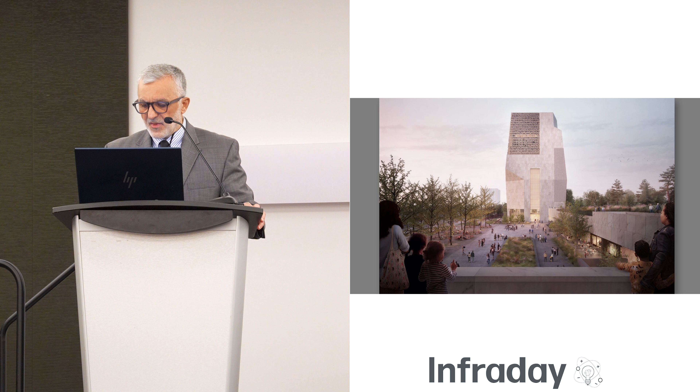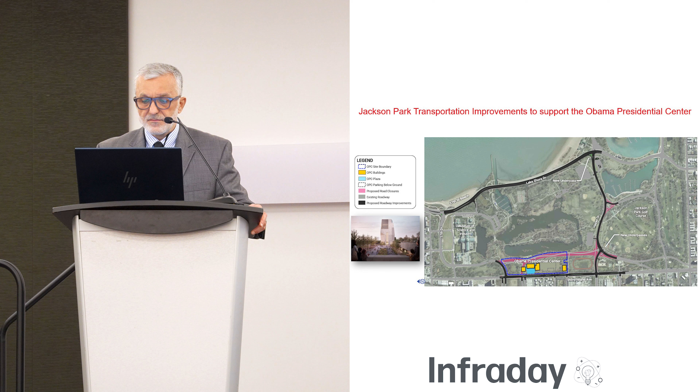Just for orientation, the Obama Center is very close to the Museum of Science and Industry. So if you are out of town, you could visit the museum and also take a look at this under construction. I'm not sure when it's going to open, but probably in the next 2 years or so. So that's the first type of program, which is coordinating with adjacent private development. And we have other examples, but in the interest of time, I included only the OPC.

Another program is this one. I could classify it as in the interest of sustainability. The current design for our roadways and bridges is very sustainable. And in the current design, the hierarchy starts with the pedestrian. You start with the pedestrian in mind, and then you move to transit. And then the third is bicyclists, accommodations, lanes, and then the auto. But that doesn't mean the auto is neglected. But it is a totally different paradigm shift from the way we used to design.

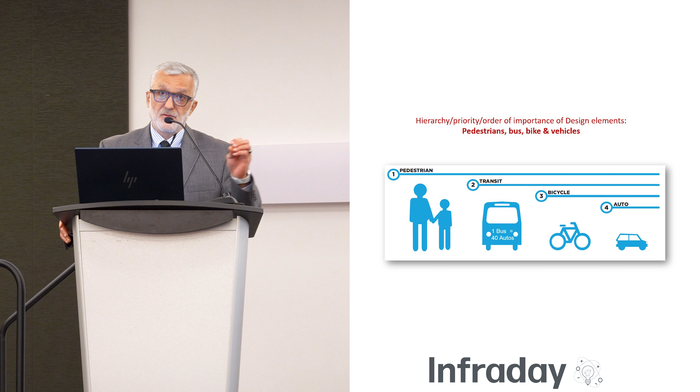I have been a while with CDOT, and I could tell you in the past we had a project, a bridge or a roadway, new road or a rehab, and we started with the auto, because it's the most dominant, most prominent user of the facility. So we used to start with the auto, and when you design the road for vehicles, you directly or indirectly design it for transit, because transit uses the same lanes as the vehicles. And then of course you have the sidewalk for pedestrians, and bicycle lane was not in the terminology, but I'm talking 20 years ago or so plus.

This type of hierarchy was adopted by the city, don't quote me on the years, around 15 plus years ago. So right now when you have a design, you always start from left to right, and you make sure you're designing a facility or a bridge or whatever the transportation facility for all modes of transportation, especially pedestrians and bicyclists. And this is in line with the previous panelists and presenters before me, that you have to do something to help the climate change, to be sustainable, decarbonization, and so on.

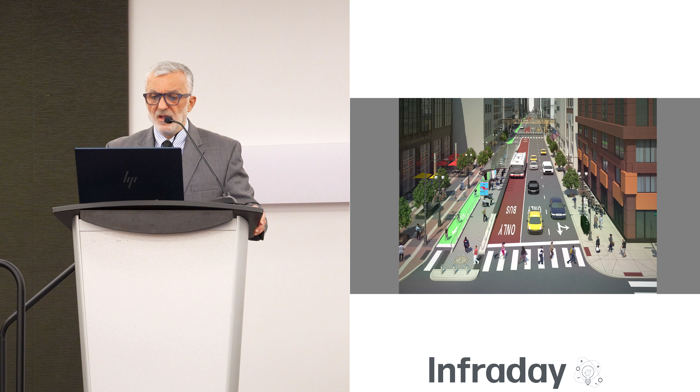So this one, you could think of it as a sustainable design, but the terminology that the city adopted is complete street design, complete for every mode of transport, every user.

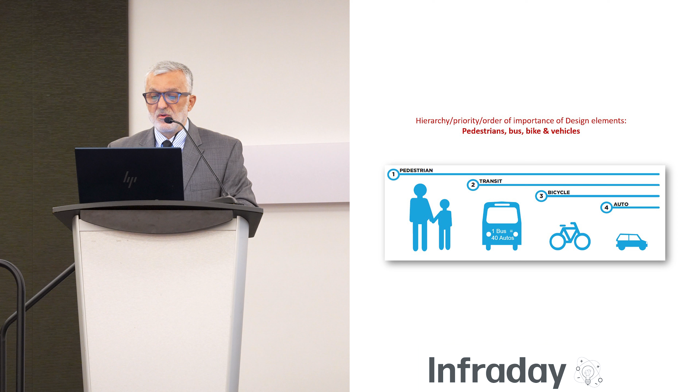Another program selected. I did not have time to select all of them, but this is the CTA stations, transit stations, an agreement between CTA and CDOT. All the train stations, the transit stations within the central business district are designed and constructed by CDOT, and then turned over to CTA for ownership and maintenance.

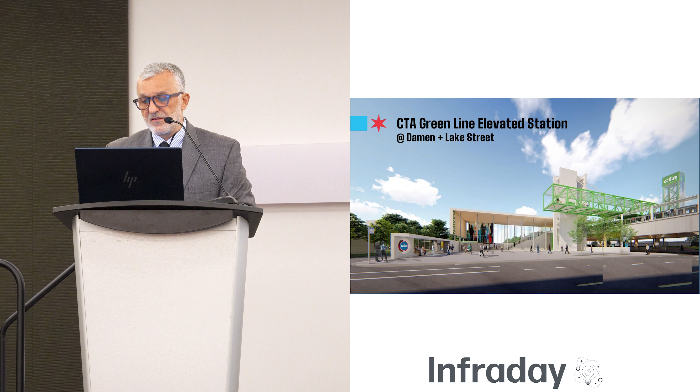The benefits are vast. LEDs have much less malfunctioning compared to high-pressure sodium. They consume less electricity. The saving to the city is $10 million per year, which is substantial. But also there is another benefit from the advancement of internet and computer technology. Each one of those lights has an IP address, where if the light malfunctions, it alerts a monitoring person to dispatch the maintenance crew to change it.

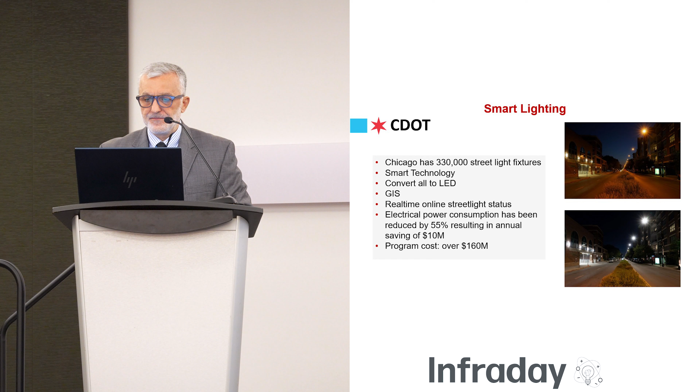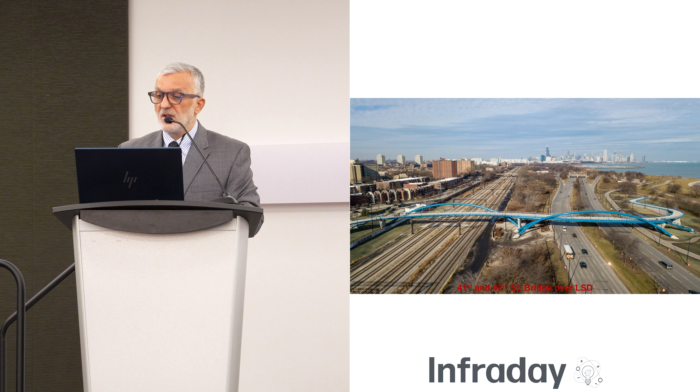So how do you make the lake available? There used to be bridges. Before, it was connected, but it was very awkward. Wooden bridges, old, not very safe. Accessibility for ADA is very important, and you can see that the ramps are very accessible with a gentle slope.

Then I will move, in the remaining time, to innovation. In all of our industry, all of your industry, my industry, which is probably very close to the same, you cannot do the same thing over and over. You have to adapt. You have to innovate. And I have seen in the previous panel a lot of interesting ideas. So what kind of innovations are implemented or in the way of being implemented at CDOT? I selected two, one in design and one in construction.

So here is the way we used to prepare all of our drawings. If you are an engineer or architect or anything, this is how drawings used to be prepared. This was before my time, I never worked on a project where we used this, but the people before us did. This is the blueprint. It's flooded with blue, very difficult to annotate, to make comments. Then the industry improved to blue line. The background changed to white, and the lines became blue. Very good. I have done many projects on this one.

And then in the past maybe 10, 12 years, the industry, all of us, switched to this. I don't know the name of this, but I'll call it a PDF. We call this blue line, we don't call this black line, but it's PDF files. But it's still very busy. So look at this, a copy from an actual design of a project we are working on, a bridge.

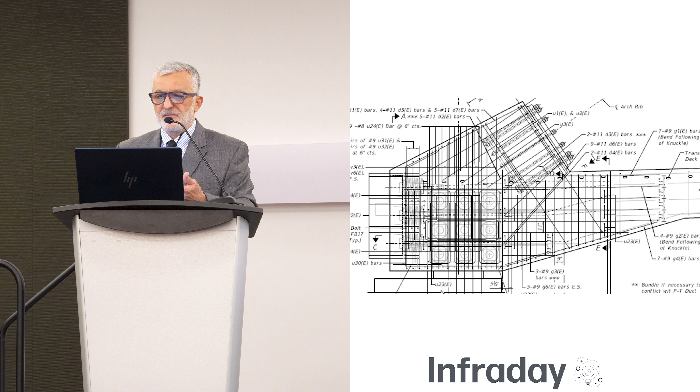So what do you do when you're looking at this on the screen? You enlarge it, and it's still very busy, blinding actually. You have no idea what those lines are, and there's a lot of waste in it. Everyone who gets hold of this drawing has to understand what this line is without going through the detail. So is there better? Yes, there is definitely better.

So here is an example from a bridge where we are almost completing the design. This is a rendering, a copy of the picture from the drawing. If you're looking at it as a reviewer, or in construction, or a contractor or fabricator, you will start asking, what are those holes? And it will take you minutes, sometimes tens of minutes, just to figure it out. But this is a 2D drawing.

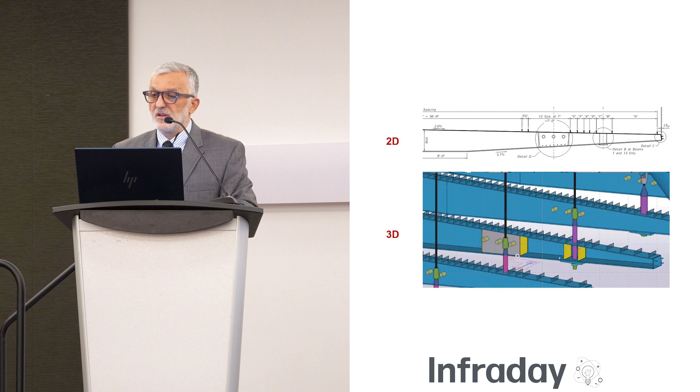What about changing to 3D? And here it is. Look at that. Those holes, 1, 2, 3, those are conduits going through the beam. And what is this dotted line? Those are stiffener plates on both sides.

Another example from the same project: how is this hanger connected to the arch? Here is how it's shown on the 2D drawing. This is the arch. This is the hanger. Very complicated. You need minutes and hours just to understand it if you are a fabricator. And here is the 3D drawing. See, it's a little clearer now, with coloring. That's all computer software used by the consultant, who did a very good job.

And then you say, well, is there better than this? Yeah, look at this. You could isolate this and put it on the right, and even this one doesn't give you the full picture. What kind of plate is this? Is it a square, a rectangle? Or you could rotate it, and then the picture is very, very clear. This plate has this funny looking shape. There is a reason for that. It's not architectural or aesthetics.

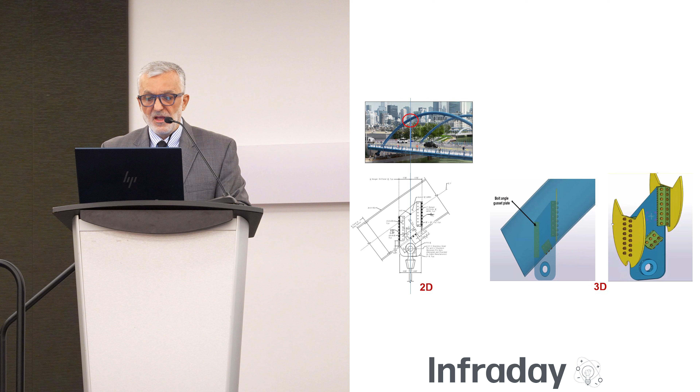Is there better than 3D? Yes, there are videos that could be prepared for the same bridge. In the interest of time, I will just advance it, but you get the picture. I don't know what to call this, maybe 4D or just video, prepared showing very intricate detail. This, I have to say, is not yet a required deliverable as part of the design drawings.

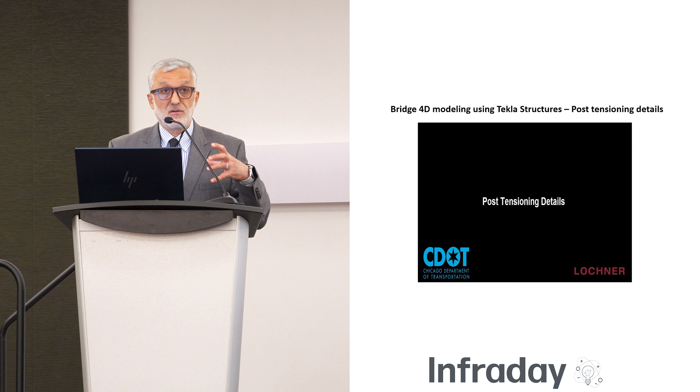For a project today, what the consulting company delivers to the owner, the client, is plans, specifications, and estimated cost. I think IDOT, and I work with CDOT, is already a little bit ahead of CDOT in thinking of making this type of computer 3D video part of the deliverable.

You hand it to the contractor, you hand it to the construction team, and look at the clarity. It saves tons of hours just trying to understand how this connected to that. Let me stop it here. You're asking me to put some conduit here, but what happened? It interferes with this thing, whatever it is.

And then the last example I want to share with you is related to construction. So this bridge, a very large bridge, about a 400 foot bridge that we needed to install over this roadway, over this railroad, and you have to keep the rail operational. So there were many challenges. How do you construct this bridge? And this is already completed, far from here. It's 130th and Torrence, about maybe 20, 30 miles. So you don't have to go to that. Go to the close ones I mentioned.

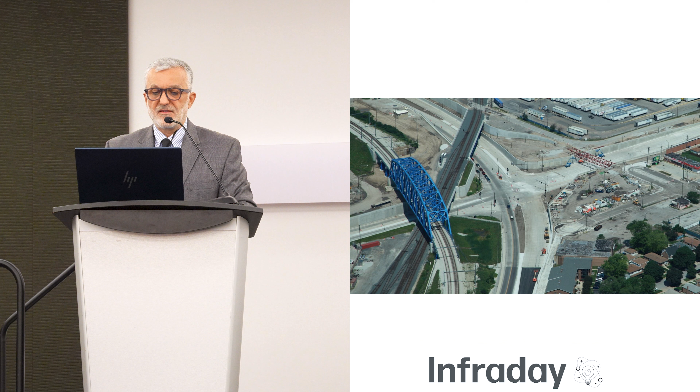Fortunately we had this land next to the bridge. Here is where the bridge is going to be. So we negotiated an agreement with the owner of this land. Then the bridge was assembled here on site. This is the blue bridge drawn to scale, and then the bridge was moved on Saturday, moved this way, and then it's placed on its final location.

The interesting thing about this method is while you're assembling the bridge, you're also building all those massive supports for the bridge. Massive, took months to build those. So you're building this away from traffic, away from the rail. This is a major rail by Norfolk Southern, while you're assembling the bridge, and then you move it into place. So that's how it was done.

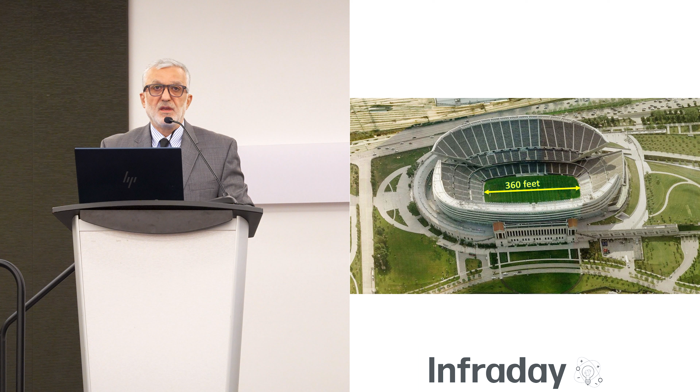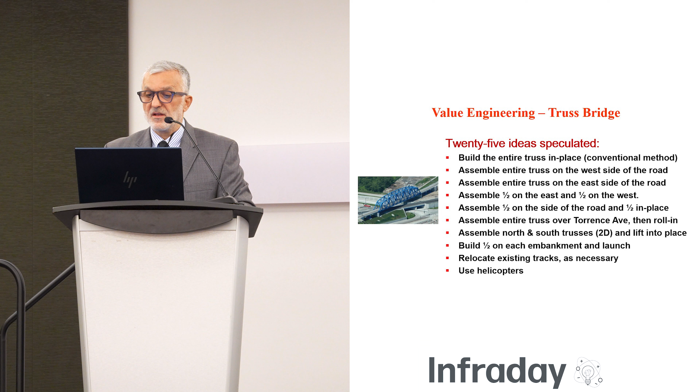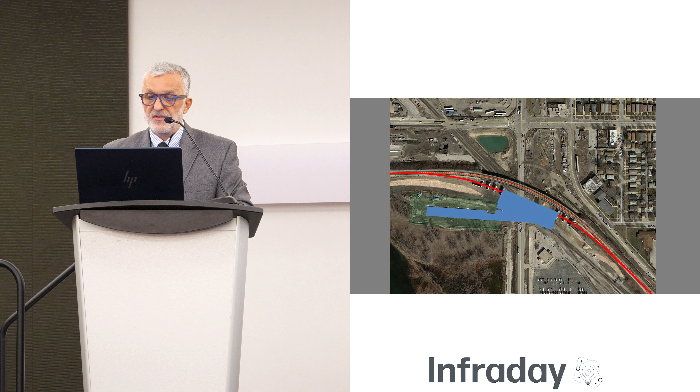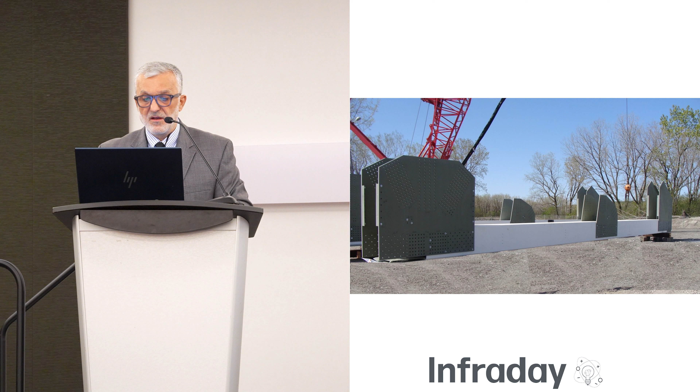So this is how the bridge was moved. The bridge is here being loaded. Momentarily you will see it moving. It will ultimately be sitting on this support, and right now it's crossing the rail. So there's time saving, cost saving, schedule, sustainable. By all means, this has been used quite a bit on other projects, but this is the first large project that we did with CDOT.